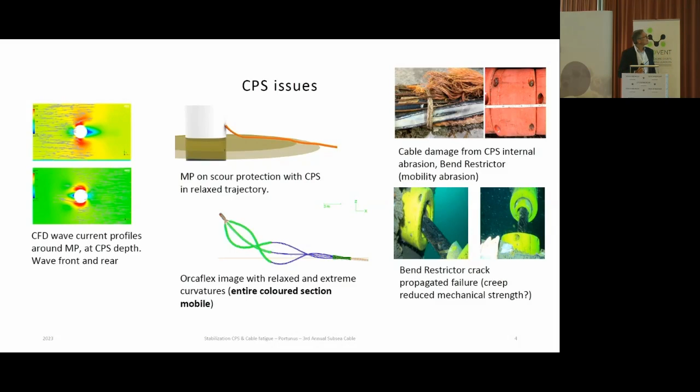And the thing is, of course, that most of the designers have made assumptions, and I'm coming back to this again. If we were going to build offshore wind parks in swimming pools with chlorinated water, this would be an excellent solution. Unfortunately, we decided to put it out in the real ocean, where we have currents, we have many different things.

I have looked at approximately 107 CPS failures in the North Sea alone, and they come in different shapes, and I've even seen sea-proof CPS systems failing. So it's not that I'm trying to point fingers at something different, because those failures that you see here are not that. But what you have here is a Tekmar system.

And this Tekmar CPS system is the same as any system, whoever you buy it from. There are 4 suppliers at the moment. You've got Tekmar, you've got CRP, that's now AIS CRP, you've got First Subsea, and Balmoral. So those are the 4 suppliers at the moment.

The big difference is, for those who actually put on their specification that they design their CPS system according to API 17, they should also note that API 17 clearly says you cannot use a bend restrictor in anything that's dynamic. So having bend restrictors, as you see here on the right-hand side of this black thing, is fine as long as it doesn't move. If there's no dynamics, this would be fine.

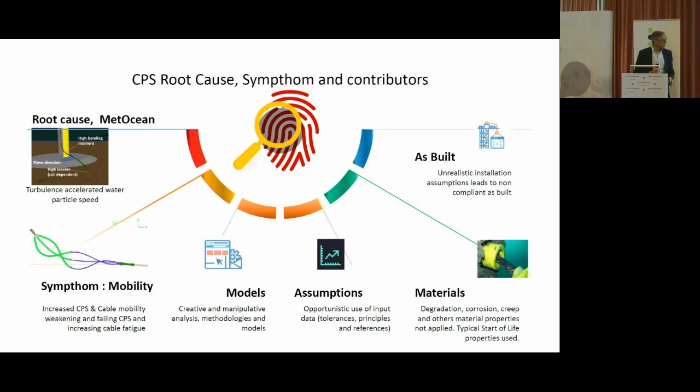When we pulled out all the cables that were going to be changed from the JDR inline field issues on Hornsea 1, we pulled out 27 cables, did 27 offshore splices, and all of them, these were sea-proof systems, were totally filled with sediments. So this thing that people think, oh, inside the CPS system the cable can actually move around. It cannot. So that's kind of the problem, why the assumptions put into the models are wrong. But the really big problem lies here.

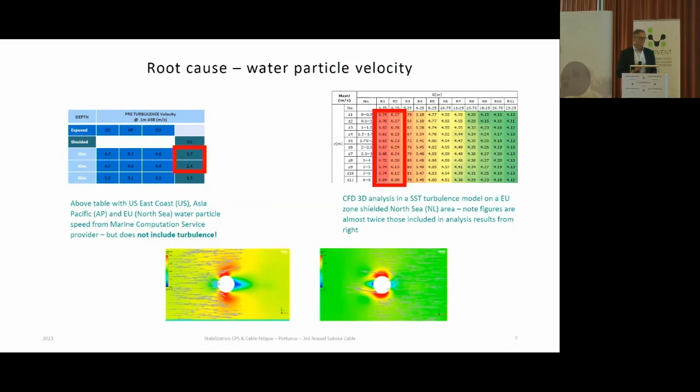The real issue is what you see on the right-hand side when we do the CFD SST turbulence model: the same figures here, unfortunately, are very close to 7 meters per second. Those of you who played with mattresses will know that anything you put out in the water with those water speeds will flip, fly, wherever. The only thing that works is rock or rock filter bags of 8 tons, and they have to be minimum 3 stacked together. That's the kind of forces that we have. This is the problem. This is what's causing it.

Despite I love rock, I live in Bergen, I look down at the boats that leave Bergen full of rock, and that's nice. But rock stabilization mitigates mobility, correct? But I've been working with dynamic cables for longer than offshore wind. If you want something dynamic over a shorter and shorter distance, it's going to be a worse problem to make it work, because the relative dynamics per millimeter of cable increases through the roof. It increases the bending moment and strain, and it lowers the fatigue life of the cable.

And that's quite dramatic. Compared to dynamic cables, when we did something like this we were lucky if we got between 25 and 30% of the assumed lifetime out of the cable. So the analysis that said it's good for 30 years is suddenly going to tell you you'll be lucky if this lasts 7, 8, 9 years. That's why the cable I showed you before looked like a ragdoll after 2 years and 6 months in the sea. And this is not in reverse.

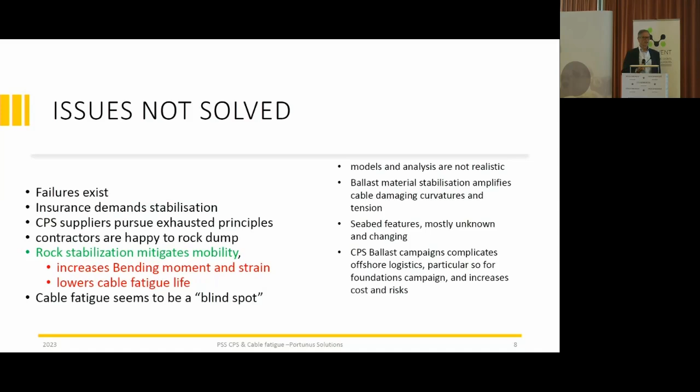That, yeah, we made a decision, but let's see what happens, because it's not a good one. So I believe that the rock berm principally is a good idea to stop the mobility on the seabed. The problem is that because it increases the stability, there's no soil spring feature which you will typically have when you engineer the CPS into the seabed. There's a soil spring, so you have a kind of a soft interface between the CPS on the seabed and getting into the seabed. This you don't have. This is the big problem.

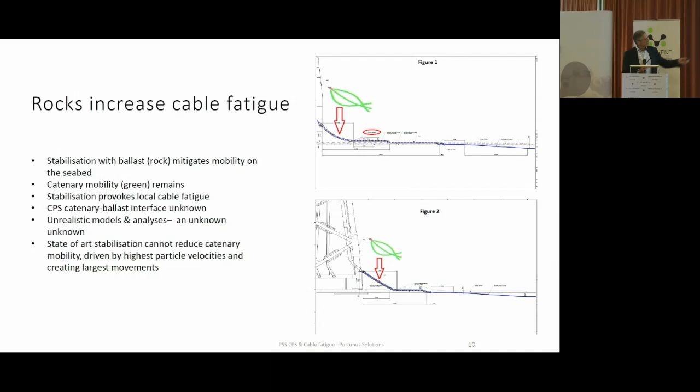The problem is where I put the red arrow and where I actually just scissors in the OrcaFlex figure is, of course, the area where the water particle velocities are highest. This is the motor that creates the movement. So it's fine that the rock berm actually stabilizes the CPS under it, but of course there's a lot of movement in the interface into it. And generically, none of the CPSs today are designed to do it. Same thing on the bottom on a jacket.

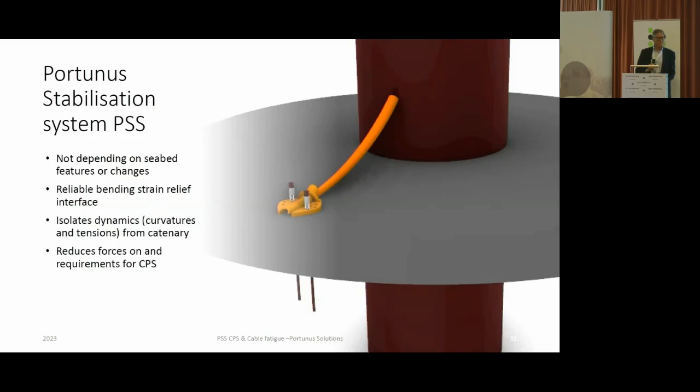So I came up with this small new idea, where I actually put down a dome on the seabed that I can actually put on top of the CPS, on an existing CPS, or for those who don't like CPSs, we can put it on a cable. Where we can actually have a reverse bending strain relief, for those of you who have read API 17. So we have a bending management system sitting down at the seabed that actually manages the curvature of the CPS in the interface into the seabed.

Looks like this, a bit more. I'm not going to spend too much time on this. It can be put down with an ROV. I'm not going to spend too much time on this either. I know that you're going to get the presentation in PDF format, so you can look at this and you can contact me more if you like it. But the thing is that we can actually install it on a new project. We can install it from the cable lay vessel.

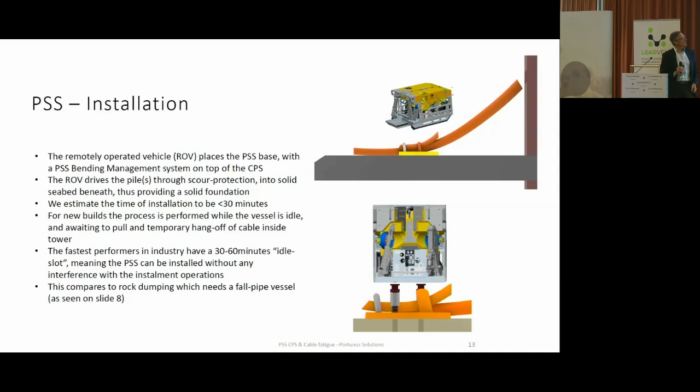So here we can get this system installed without impacting the critical part of the cable lay vessel, because the cable lay vessel is going to have its ROV sitting there for approximately 30 to 60 minutes between the CPS being interlocked and the temporary hang-off inside the tower being made. This is the time that we're going to use to put these two piles onto the seabed. Looks like this. I just put this in so you can see it's flexing around. I must admit, I'm not an artist, but I took some artistic freedom. The wall thicknesses you see here are widely wrong.

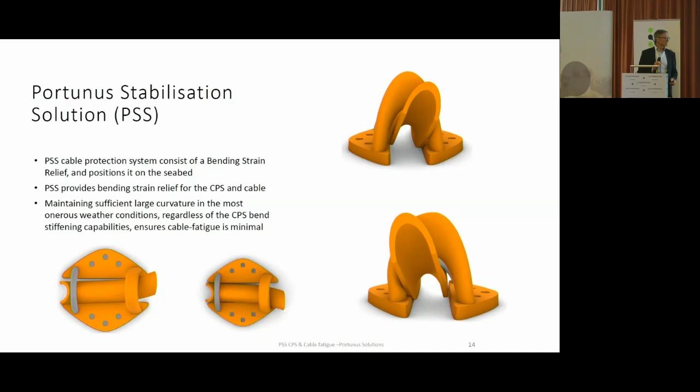So in order to take this on, for example, an HK set on Race Bank, just to name a few projects for no particular reason, the transversal forces on the CPS are in the region of 12.5 tons. Half of this is taken up by the interface into the foundation. Half of it has to be taken up by the seabed interface. When you put something down on the seabed, it scours away. So therefore, there's a little smart feature inside here where we can have a compression part in it, so it allows itself to drop down with the seabed.

And as René has told us, never a problem with the scour protection, rocks and so around. Of course, nobody is interested in whether the rocks move around 10, 15 centimeters. But we are, when we have the CPS and the cable hooked up to it. But the thing is, this is half a CPS, and it needs to be compressed against the seabed, against the scour protection on the left, and it can of course also be used on non-scour protected areas. I would say in most areas where people compete for price, you will only have non-scour protection around jackets, because I don't think anybody will want to pay for the extra 15 meters of monopiles. So, yeah.

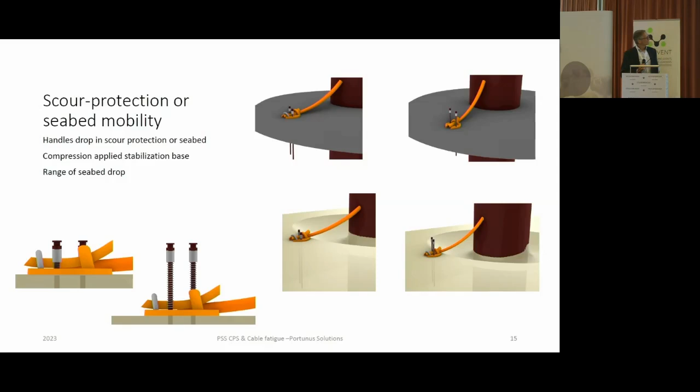It gives a lot of freedom for the installation. You can put it around. There's one thing that I learned from working more than 30 years underwater, and one thing is it's nice being small underwater. I don't fit into that category possibly. But the other thing that's nice is there's nothing like small accuracies. I mean, if you come and ask, oh, we're going to put this down with 0.5 meter of accuracy, forget it. If you get 1.5 meter or something in an installation campaign, you're lucky.

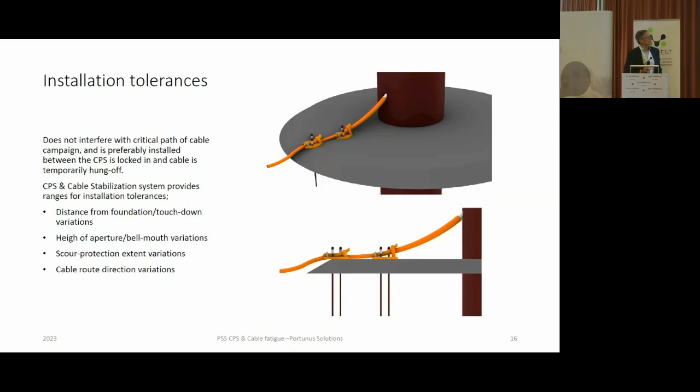Very often we put out the monopiles, and now I've been told today that in some of the projects they put the monopiles wrong. Often it's the other way around because they're being monitored by aerial systems. So the monopiles are put down accurately, but the scour protection may be off. That's it. I lost my time.

Then we're indeed a little bit over time, so I just have one question. Is the expected lifetime for that device 30 years or more? The expected lifetime for that particular part is not the expected lifetime. And the cables are not expected lifetime. It's the fatigue life of it. There's a small difference there. Okay, but so that's a no, is it?

Yeah. Oh, but is this then also designed for retrofitting or only during? It's both for retrofitting and for new sets. But the thing is, some of the newer projects actually build in that they hope they will get extensions on the leases, because the wind parks are so expensive that they expect that after 30 years they can actually get 10 years extra. So, for example, Ørsted is asking for some of the projects for 40 years, not just 30 operational.

Yeah. Can I ask a question, please? Yeah, Henrik, thanks. That was a really good presentation and discussion. I'm Chris Sturgeon from Red Penguin. It seems to me that the real root cause is putting a static cable in a dynamic environment. No. But you're pinning it down. It's like a sticking plaster. You're trying to solve the problem with a cable protection system that repeatedly seems to be more of a cable failure system than a protection system.